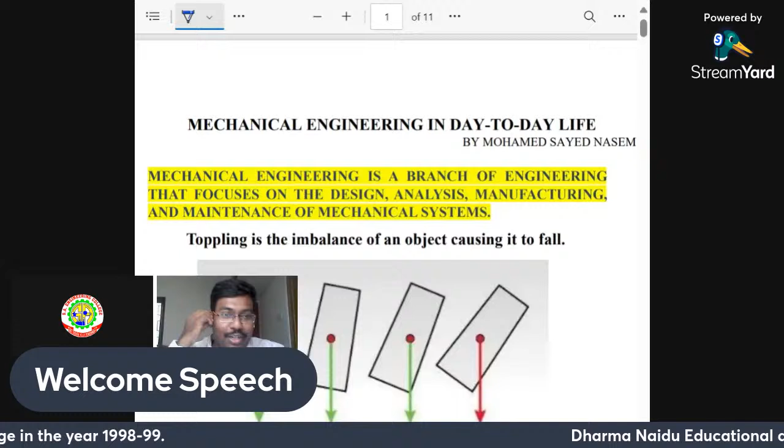Our main heading today is mechanical engineering in day-to-day life. So, from the time you get up in the morning and do your day-to-day activities, you encounter a lot of mechanical engineering activities or challenges or tasks. So here I would like to go through two concepts which you could grasp easily and try to implement in everyday life and appreciate how it works and how to design different concepts, right? So let's start.

Okay, so the basic, what is mechanical engineering? If you want to join a course of mechanical engineering, you should know what it is, right? It is nothing but a branch of engineering that focuses on design. It's going to be design. If you are taking this mechanical engineering course, you will be designing and you will analyze.

Once you have designed a product, let me say you are designing this pen, right? So I have two different pens here. Let's have an example. You design this pen, so you give some dimensions to this pen, how big the pen should be, what should be the size of the tip, and how is the grip. So that is nothing but designing. Okay. Then you analyze it.

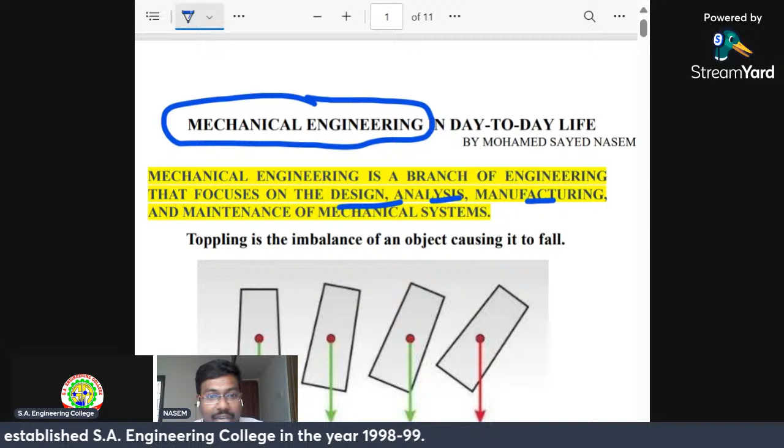So in that manufacturing part, what will happen is now I have a design. I analyzed that design and came to the conclusion that the design is good. But what if that design cannot be manufactured? Nowadays any design could be manufactured thanks to the latest technology and the intervention of computers into the field of mechanical engineering. It's making our life very easy. We have a lot of technology like laser cutting, where you can cut sheets and plates very fast and assemble very fast, right?

So now this pen, I have designed it, I have analyzed it, it is okay, but if it cannot be manufactured economically, that is one point in mechanical engineering to be noted. We are always concerned about the working and the cost. If you're going to buy a car, the first thing you ask is what's going to be the mileage, because the car you buy should not empty your pocket, right? And it looks good. And what is the initial cost of the car? So everything matters. Mechanical engineering deals with that also.

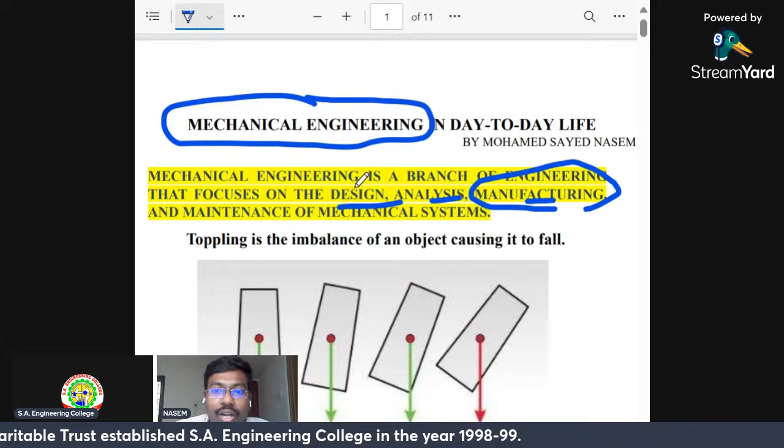So it should be able to be manufactured easily. Once you design, you analyze your design, and that design should be able to be manufactured easily. And it does not stop with manufacturing. It also comes to maintenance, right? Once you buy a car, after a few kilometers of driving you need maintenance. So in short, mechanical engineering is nothing but designing, analyzing, manufacturing, and giving maintenance to a product. So this is what mechanical engineering is. I'm just touching briefly on it, right?

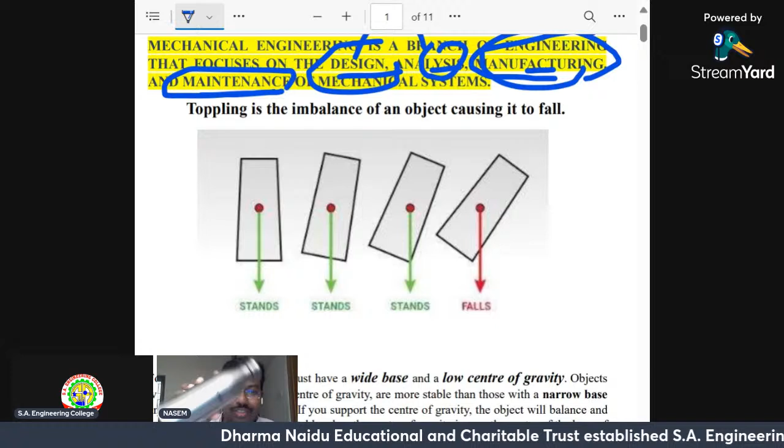So I want to teach you a topic: how an item or product is going to be a balanced product. For example, I have this bottle. I don't know whether you'll be able to see it. If I place this bottle on the ground, the bottle should be stable, right? It should not topple down. If it topples down, that means there is something wrong. You call this a failure. The product has failed because the purpose of the bottle is to store water and it has to be upright, right? So let's have a brief idea of when an object is going to stand and when an object will topple.

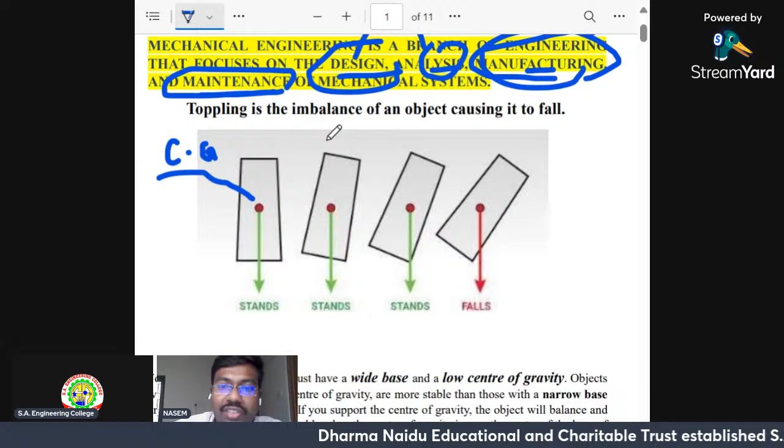So you would be able to see on the screen, right? I have an object and I have got a red dot. This red dot is nothing but the center of gravity, CG. In short, let's call it CG, the center of gravity. All objects have a center of gravity. So what is the center of gravity? Center of gravity is nothing but a point in an object where the whole mass lies. So if this is a perfect rectangle, I'm not able to draw a perfect rectangle, but consider it is. Can anyone type in the chat where the center of gravity will be?

Okay, the question is, I have a perfect rectangle. Let's start with two dimensions; we'll progress to three dimensions later. If I want to find the center of gravity, it is easy because this object is symmetric. I can draw a line dividing it into two, and draw another line dividing it into two. The intersection point of the two lines will be the center of gravity. Or, for a rectangle, you can draw the diagonals, and the intersection of the diagonals will be the center of gravity. Please mind my drawings are not accurate because I'm drawing with the mouse. I hope everyone adjusted.

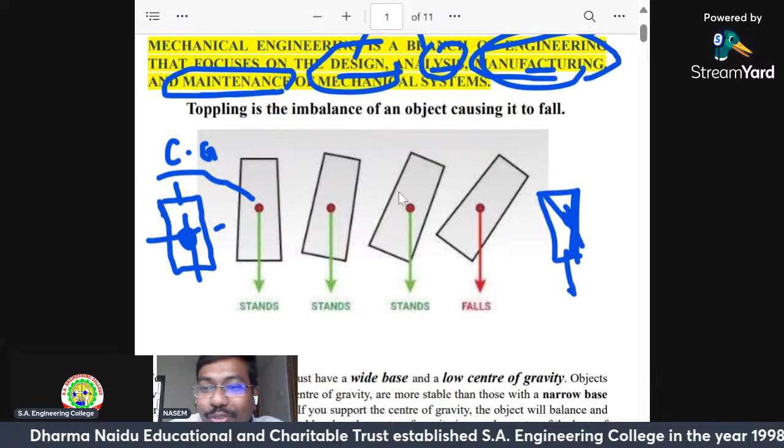Okay, so let's deep dive into this image. I want you to have a close look at it. Let me erase something here. So what happens is the center of gravity, or weight, you can call this weight also. Weight is nothing but a force due to gravity. So weight is nothing but a force. Weight is nothing but force due to gravity.

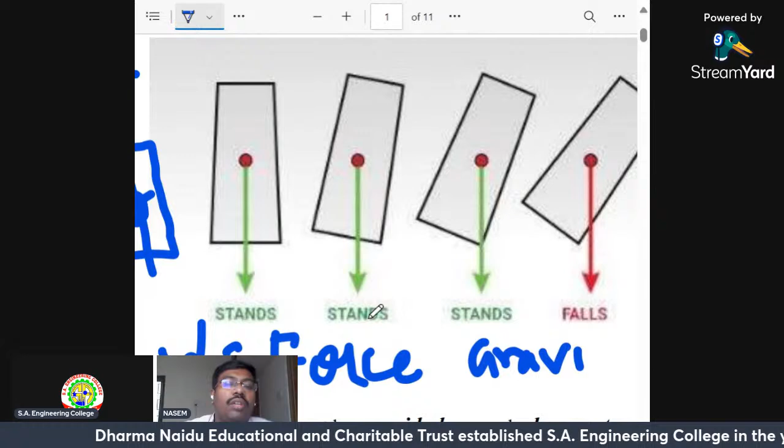Okay, so weight is nothing but a force due to gravity. So we can see the center of mass. So if this is the center of mass, the force is going to be downwards, right?

There are two conditions for a body not to topple. Number one, you need to look at the base. Let me change the color. Okay. So we'll look at the base. See, this is the base of an object, right? This base is quite wide enough. Okay. Base, and the center of gravity is at some height from the base.

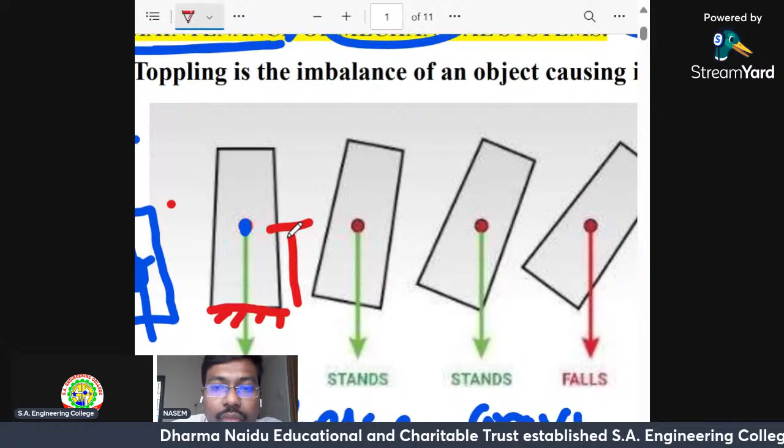So let me tell you a condition where you will have an object which does not topple. The condition is, for an object to be stable, it must have a wide base. So look at this base. This base is wide, and the center of gravity falls within the base. This line falls within the base. So this is going to be stable.

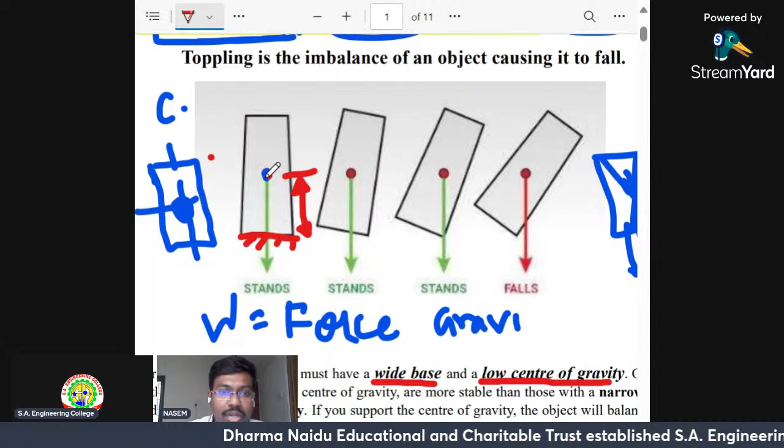And one more thing, which is very crucial, is bring the center of gravity as close to the ground. Look, this point is at some distance from the ground. If somehow I'm able to change my design and bring this point here, then it will be much more stable. So for an object not to topple, you have two conditions. One is the base must be as wide as possible. Number two, you need to bring the center of gravity as low as possible.

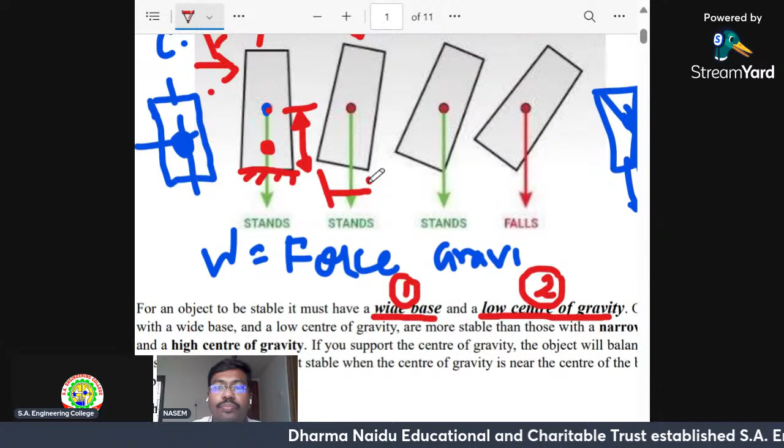So what is happening here is I'm just going to push this tumbler with some force, right? So if I push this with little force, this condition happens. So what is going to happen? Now look at the base. The base has shortened. The center of gravity is here, and now also the center of gravity line is within the base. You can see it in the diagram, right? The center of gravity is within the base.

So when you release the force, what is going to happen? The tumbler is going to come back to its original position. It is not going to fall down. If I apply more force, the tumbler goes a little bit more slanting, right? You can see this is the center of the tumbler, and now it's more slanting.

What happens now? Also, the center of gravity line is within the base. This is the base, right? This is within the base, at the end, at the tip. At this condition also, the object will not topple or the tumbler will not fall.

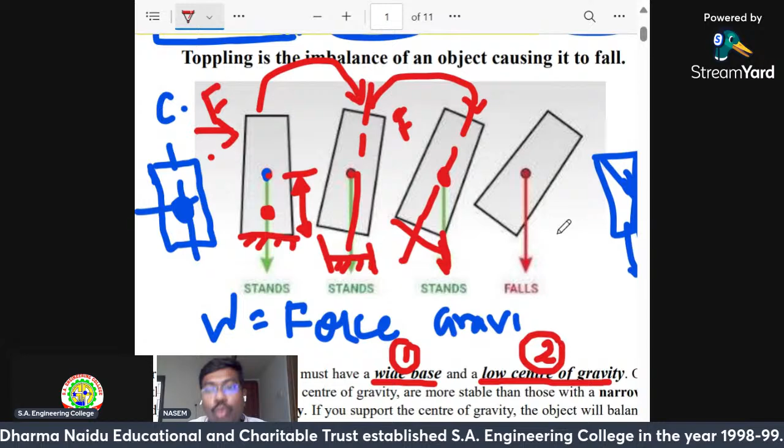If you apply more force, now what is happening? This is my base, and my center of gravity line is out of the base. When this happens, the object is going to topple. So basically, I just want you to grab an idea what will happen to our object, whether it will be stable or it is going to topple on applying some force.

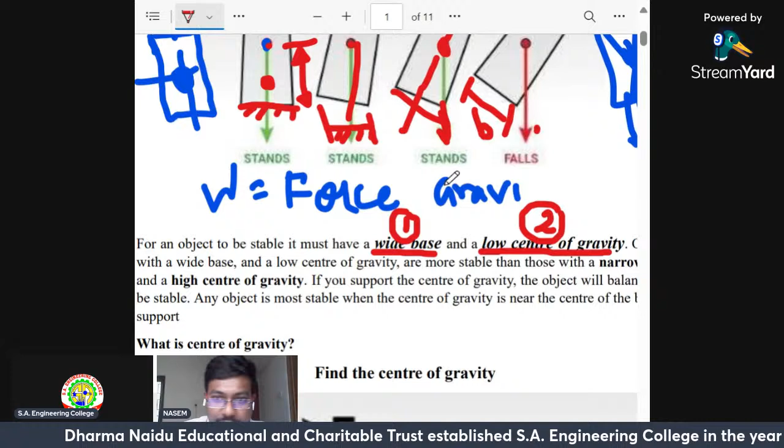In order to be stable, there are two conditions. One, the base should be as wide as possible. Second condition, the lower the center of gravity, the better. The second condition we have not seen. As of now, we have checked out what the first condition is, right? The wider the base, the better, right?

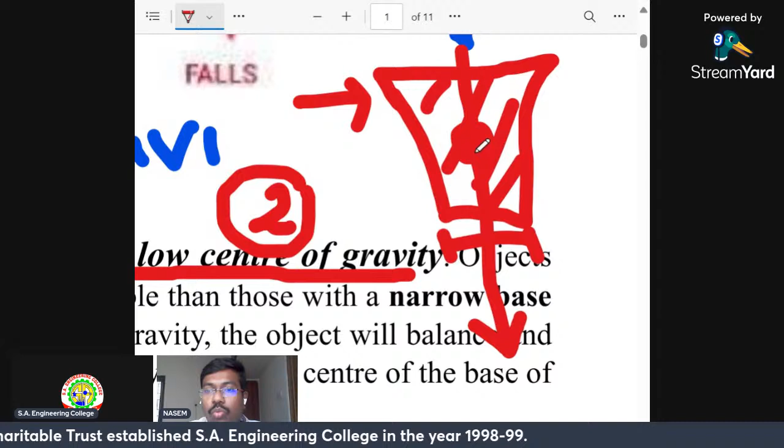For example, let me draw a small drawing here. So if I have a tumbler like this, and this tumbler is full of water. So what is the base now? This is the base, and still it is symmetric. If you draw a line here, your center of gravity should be somewhere here, and the weight should be in the base. So you can push this tumbler a little bit at some angle. At some angle, this center line will cross the base, and the tumbler would come down.

Okay, that's an idea. Now, if you draw a horizontal line here, dividing this into equal sides, the top portion volume is more than the bottom portion. That means the center of gravity will be at the top. If I design a tumbler with a bigger base, the bottom volume is more. That means the center of gravity will come down. Okay, so let me erase and go back.

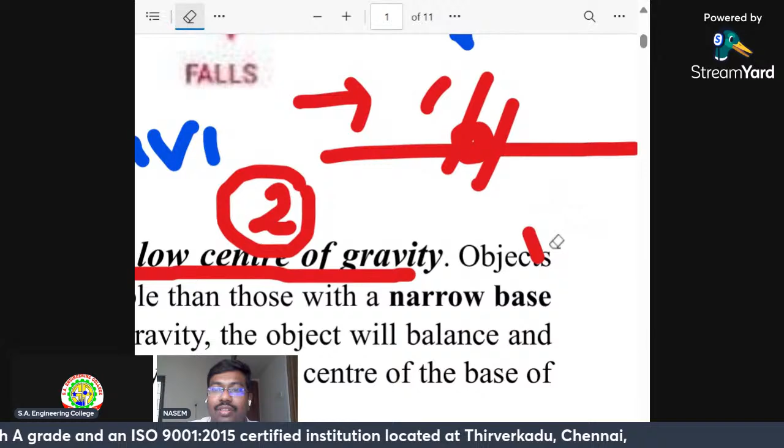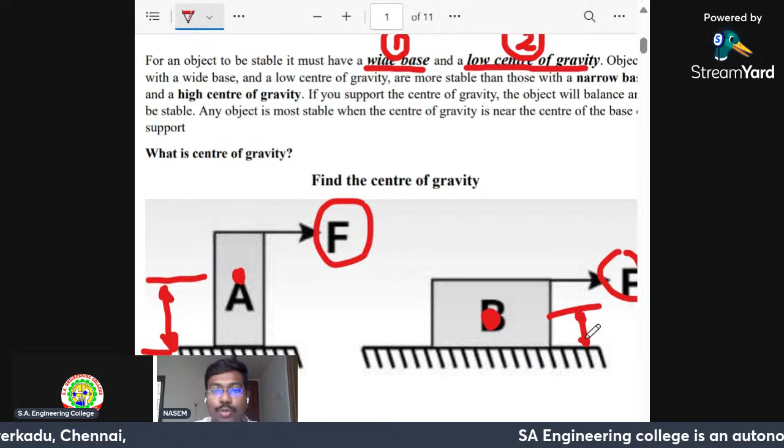I would like you to type in the chat. I would like people to participate and help me in making this presentation much more lively, right? So I encourage everyone to participate.

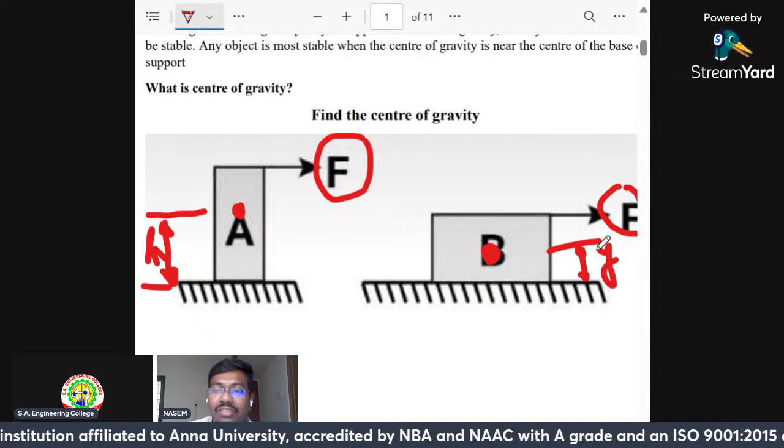So from this, you can see that the center of gravity of object A is much higher than B. And to be noted, A and B are almost the same object. You just tilt it, you will get B. Okay. So now, out of conditions 1 and 2, you can definitely say that whichever has a low center of gravity, that is better. So let me say this has a height h, and this has a height y. You can compare that y is very small compared to h. That means from this criteria, lower the center of gravity, this is a good design. I'm saying it is a good design in the sense that it is not going to tumble or fall. Whereas A has a much greater chance of falling.

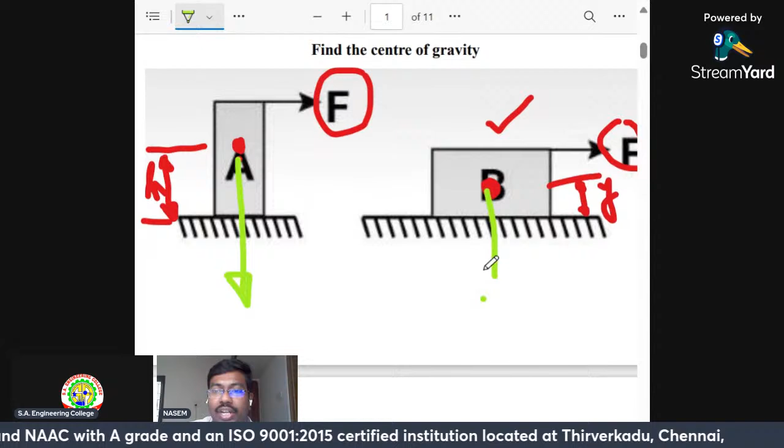Number two, wider base. So let's see. I told you that the weight is always going to act downwards from the center of gravity. So let's say this green is the weight force. So this has a weight force here. In this orientation also, you will have a weight force aligned with the center of gravity. Now I want you to compare with condition one. I told you wider base. Which has a wider base, A or B? This is the base of A. This is the base of B. Obviously, from the diagram, we can see that B has a wider base. That means, again, a tick mark for B.

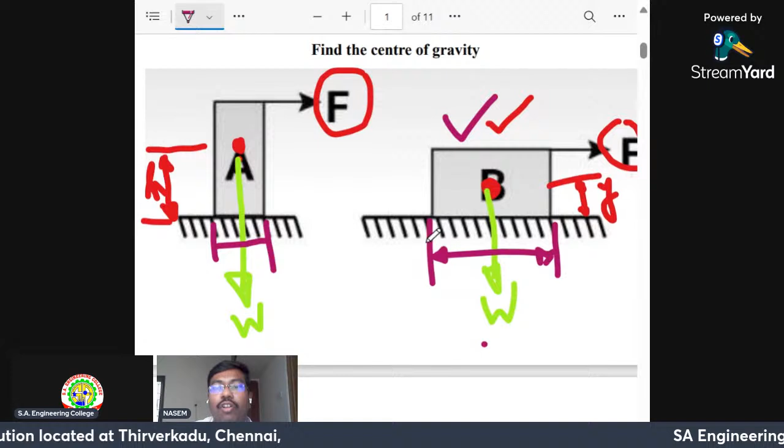So, if the same object is oriented in a different way, and if it is subjected to a force F, B is more stable than A. See, it is a very small change. I have not changed the material of the object. I have not changed the object. I just changed the orientation of the object. Changing the orientation, you can see how strong, how stable that object becomes, right? So these are the two conditions which I want you to remember as we go down the presentation: the wider the base, the lower the center of gravity, the more stable it is going to be, right?

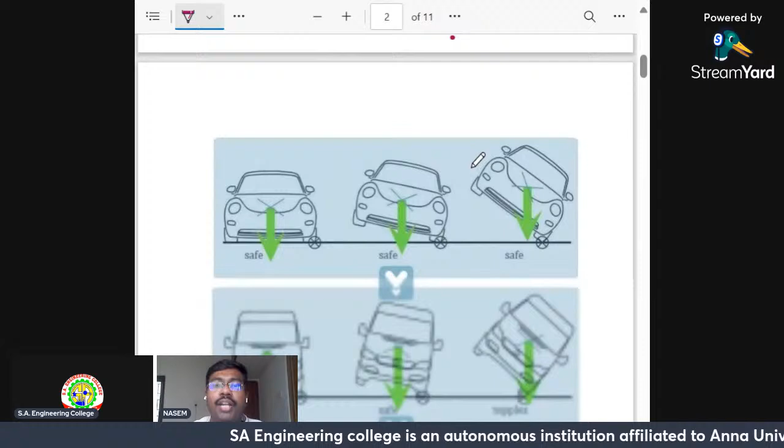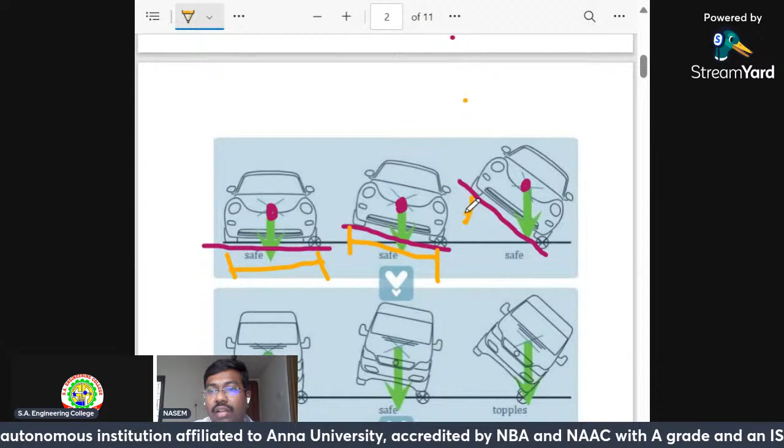So here I have a car. See, what is going to happen? The car's center of gravity is somewhere here. Same, the car's center of gravity is somewhere here, and somewhere here. We are riding this car on different slopes, making a turn on different slopes. Let me indicate the base with a different color. So this is the base of the car. Here the base of the car. Here the base of the car. So I want you to say whether this car will roll or not.

In this condition, the car is not going to roll because the weight force from the center of gravity is within the base, right? I told you the wider the base, the better. In this condition, the force is acting within the base. Okay. When I take this car, a smaller car, like a low clearance car, the height of the car is low. Because the height of the car is low, the center of gravity will also be low, right?

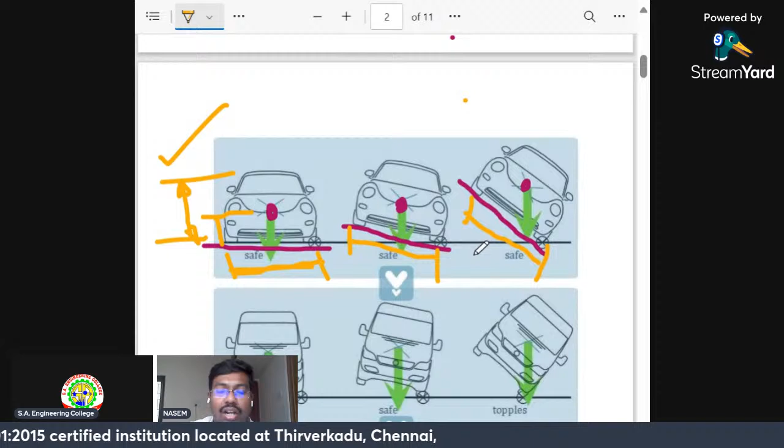So when you take this car to a slightly steeper road and try to take a turn, you will get this configuration. The center of gravity is down, the base is still wider, so it is going to be safe. Here also, when you take it to a much more tapered angle, so if the road is tapered much more to a larger angle, this is going to be safe as the weight force is within the base.

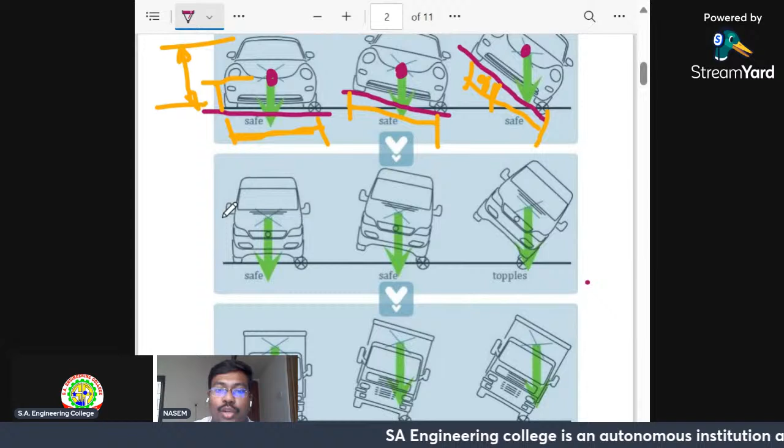Okay, now let's consider the same angle the car goes, but the car is different. Here you can see a car like a bigger SUV. It is a tall car. The height of this car is more when compared to one. Let me label this as two. Car two is much taller than car one. So the center of gravity is here. In this condition, look at the base. The center of gravity is within the base, so it is going to be stable.

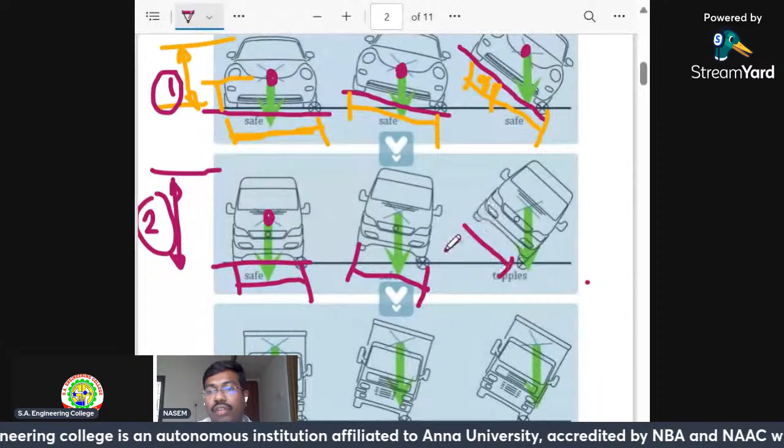Here, look at the base. The center of gravity is still within the base. Here, look at the base. The center of gravity goes outside the base. So this car will definitely topple in the third condition. If I drive this car at a much steeper angle, this car is going to topple.

So now let's look at the van. There is a difference between the center of gravity points, right? This is closer to the ground. This is much farther away from the ground. And now the center of gravity has gone really up because it is a truck. It is really high, and if the truck is loaded, the whole dynamics changes, right? Because the weight is distributed on top of the truck, the center of gravity will be above. So bigger distance. This distance is really high.

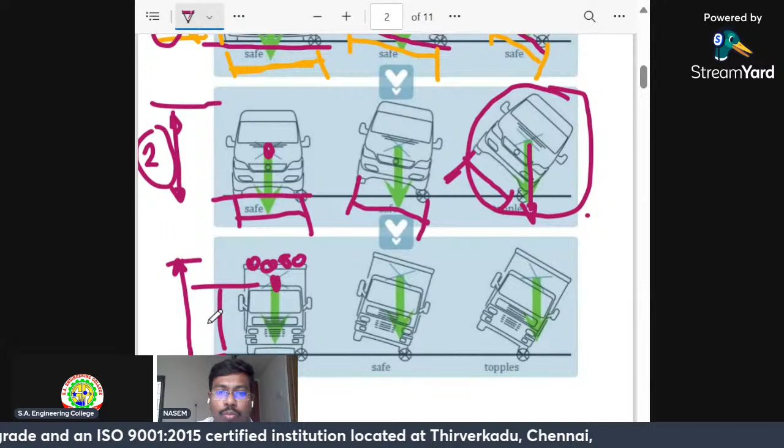So what happens when you take this truck and you try to drive it on a smaller slope? This topples. Okay, so you would be able to say whether the truck will be toppled or the truck will be stable based on two criteria, right? One, how wide the base is. Number two, how far my center of gravity is from the ground.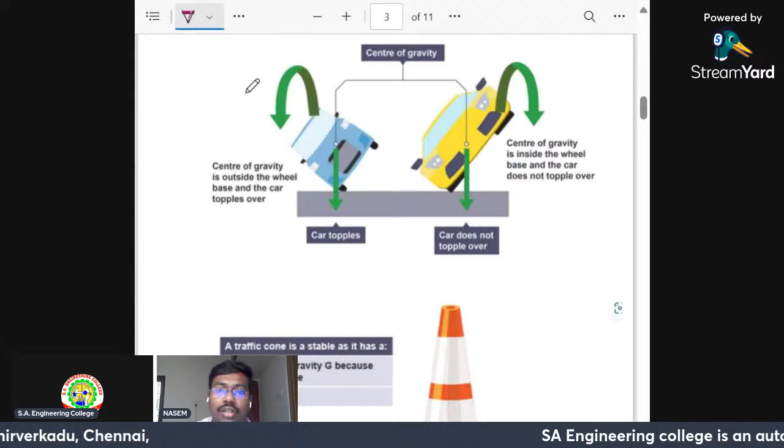Okay, so here you can see this car, right? This is car A, this is car B. It is just an example. So what is happening? This is the base. Here, look, this is the base. The center of gravity is out of the base, so this car topples. Here, the center of gravity is within the base, so this car does not topple. This is more stable. B is more stable.

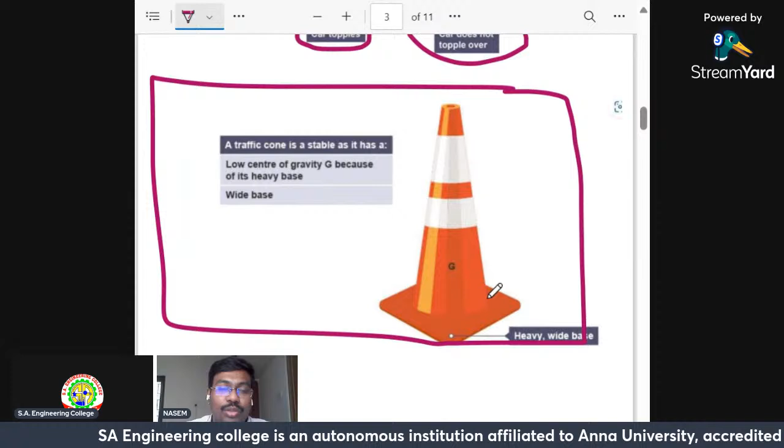So if you look and appreciate these designs, you would also have seen this cone, right? On all roads you can see this cone. The cone is designed in a particular way so that it does not fall down so easily. These cones are kept in rows in order to divide the roads and alter the traffic. It is designed in such a way that more mass is at the bottom. If you divide this cone into equal halves in size, say this is 5 units, the top will be 5 units, right? But the center of gravity is going to be much below.

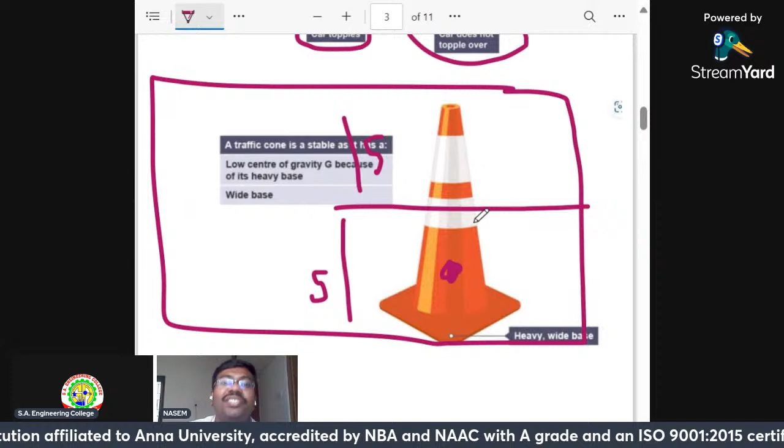Why? Because the volume of the cone above the center line and below the center line is different. More volume, more weight, so the center of gravity will be down in the cone. If it is symmetric, it will be on the exact line. If I divide my cone vertically, the right side and left side are the same. So the center of gravity will be on the center line and at the bottom. And in order to make the cone very stable, they are making a bigger base. That is why they have this square shape attached to the cone.

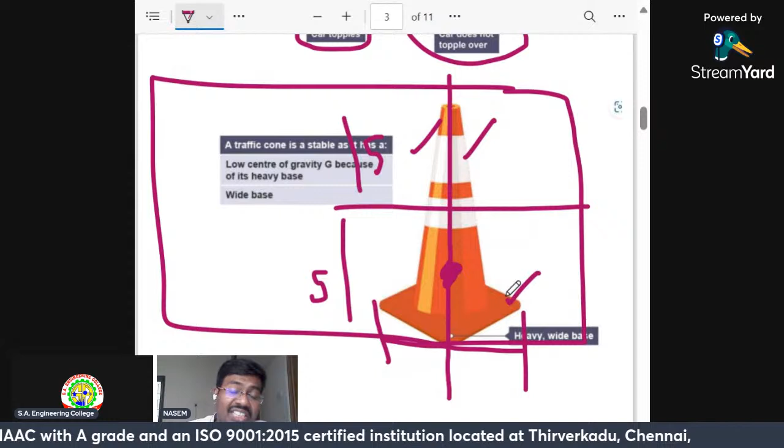You could ask me, why is it necessary to make the square shape? If you are making a product, the less material you use, the more profit you make. Your production cost is going to be less. But the application won't suit, right? If I don't have this base, if I only have this cone, what will happen? A little bit of force is enough to topple it.

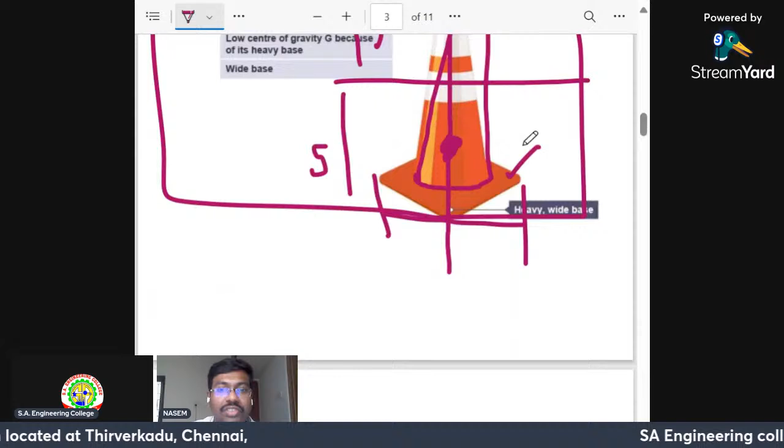In order to overcome that, we have a square or a rectangular base, so that I could widen the base so that it could be much more stable, right? So let's go into a more practical thing.

So if you want to make more money, what you do is you try to give as little juice to the customer. So the customer should feel as if he is having a bigger glass, or he is enjoying the royalty or luxury of having something big. But the volume of juice in the glass should be less, so that we could make more profit, right? If you are able to have a tumbler which can serve two servings, that means you are making profit of one glass, right?

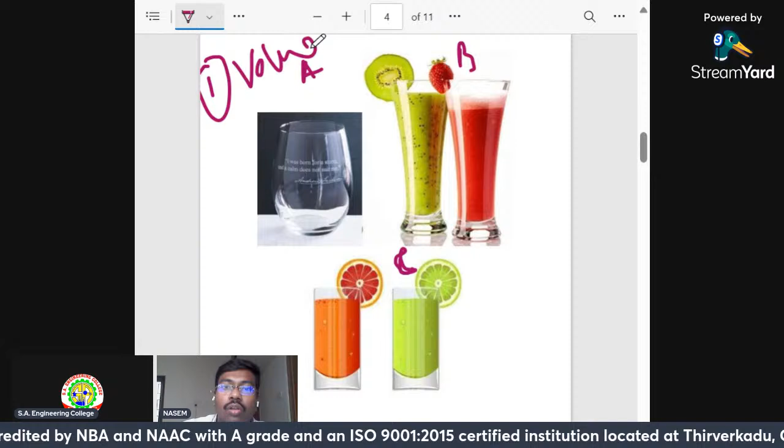So what kind of a glass would you purchase? That is one criteria. So our objective is that the volume of juice should be less. Number two, you will use this glass for a long period of time, right? So these glasses go for washing and you will give them to the customer. The customer will drink and place it on the table, and it should not break. So in order that it should not break, it should not fall down, right? It should not tip over.

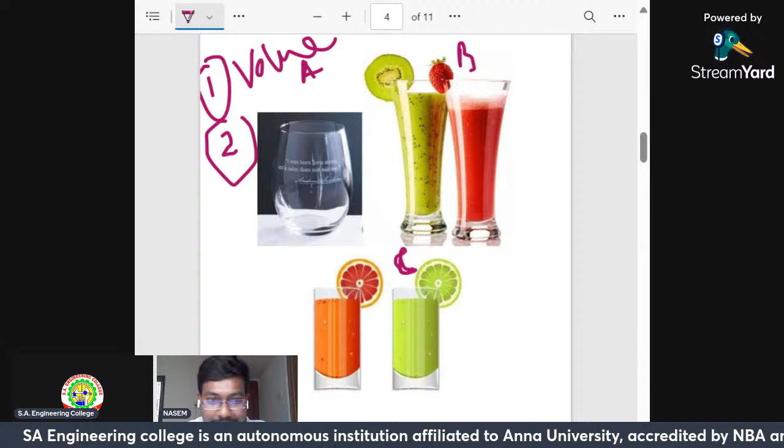It should be stable. So we are going to look into some designs now considering the volume as well as the stability. See, from criteria to criteria, requirement to requirement, our design changes. Here, our requirement is our glass should have lesser volume so that it looks bigger. The customer feels he is enjoying that royalty. And number two, the glass should not break. If the customer places it on the table, it should not fall down or topple.

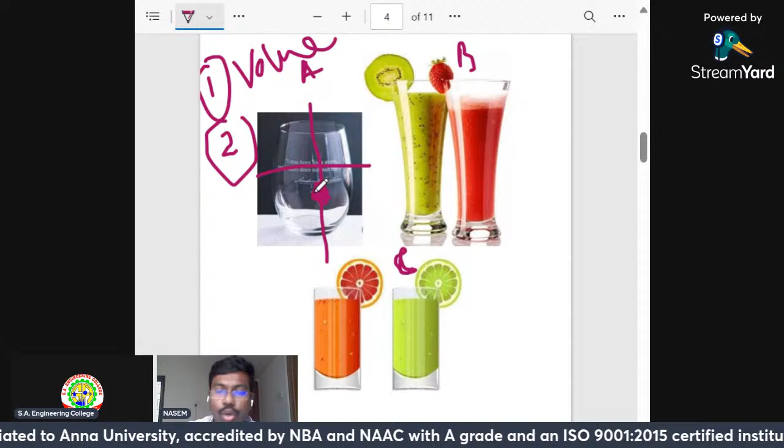Okay, so now let's analyze glass A. Glass A is pretty good. So let me divide this into two parts. The center of gravity, you can see from the geometry, the bottom is bigger. So the center of gravity will be at the bottom, somewhere here. And about this line, the y-axis, it is symmetrical. So the center of gravity will be here. So one criteria is to lower the center of gravity. This is good.

Now let's analyze this one. Here, if I draw the line of symmetry, it is symmetrical. Now more volume is at the top. Let me choose a different color to represent the center of gravity. The center of gravity point will be at the top. Look again. Here the center of gravity is at the bottom. Our condition is to lower the center of gravity. Stability is good. So when you compare these two glasses, which is better?

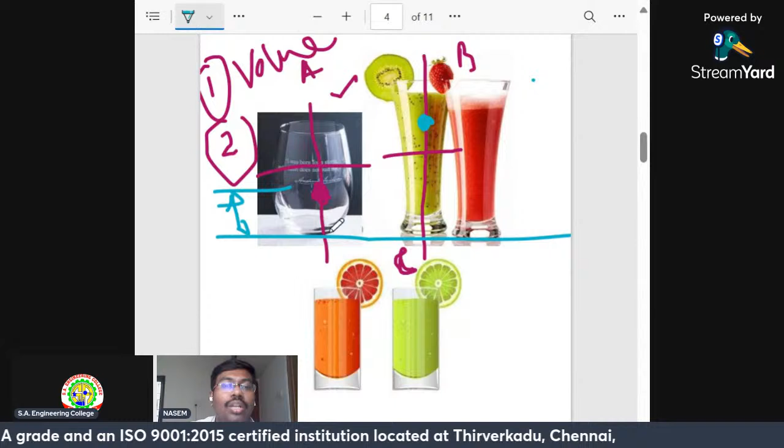This glass is prone to less breakage due to tumbling or falling down. This is much more stable because the center of gravity has gone down, and one more, look at the base. This has a wider base when compared to this one, which has a shorter base. So glass A is clearly the leader here over glass B. But we are comparing only the stability.

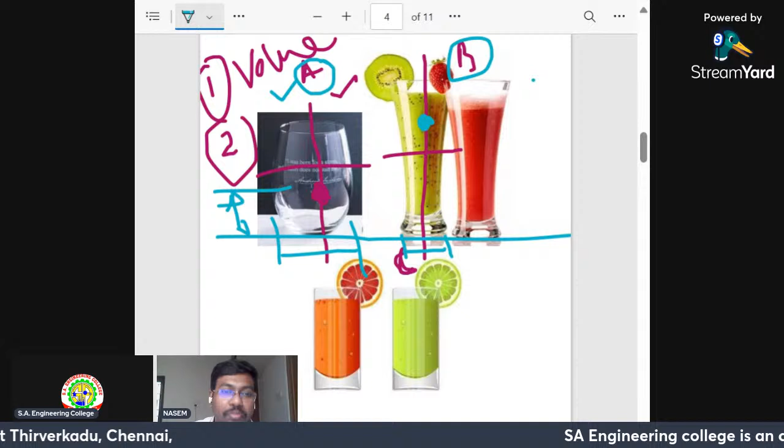When you compare the volume, glass A will occupy more volume. That means you will be serving more juice to the customers if you use glass A. And it looks small. Even though he's enjoying more juice, the customer will always feel he has been given something small and it is not value for money. Whereas when you give this glass, the customer feels that he has more juice, but actually less volume of juice is in glass B, but the glass falls, right?

So in A, for condition two, it is stable but more volume. In B, it is less stable but less volume. Both have an advantage. Let us go for glass C. This looks like a rectangular glass. So if I divide this equally, the center of gravity will be exactly here, and it has a wider base.

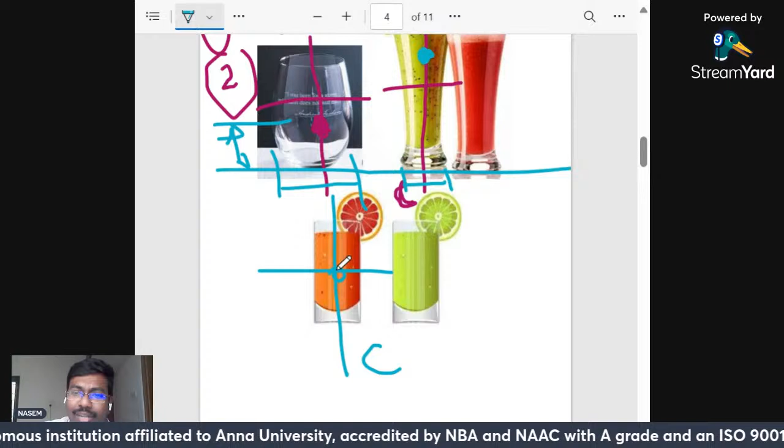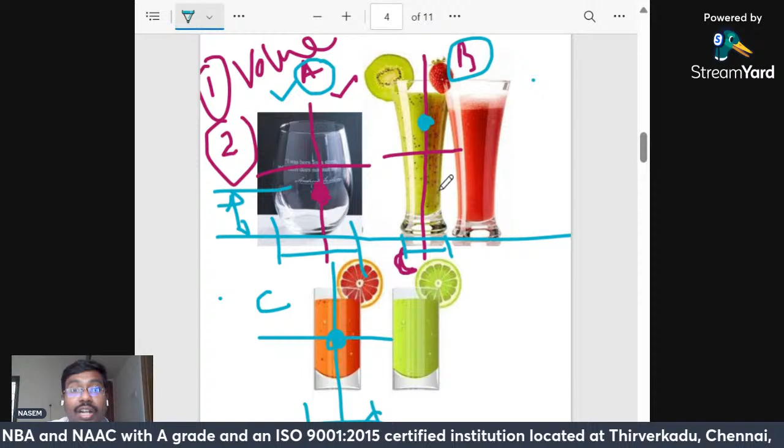Compared to A, C has a much higher center of gravity, but compared to B, C has a much lower center of gravity. That means C is more stable compared to B. And when you compare its volume, this takes more volume than B, but less volume than A. That means you will be pouring more juice in tumbler C compared to B, but less juice in tumbler C compared to A.

So this is also okay. This is going to be stable, but still I'm not satisfied with the design because I want to satisfy both the conditions, volume and stability.

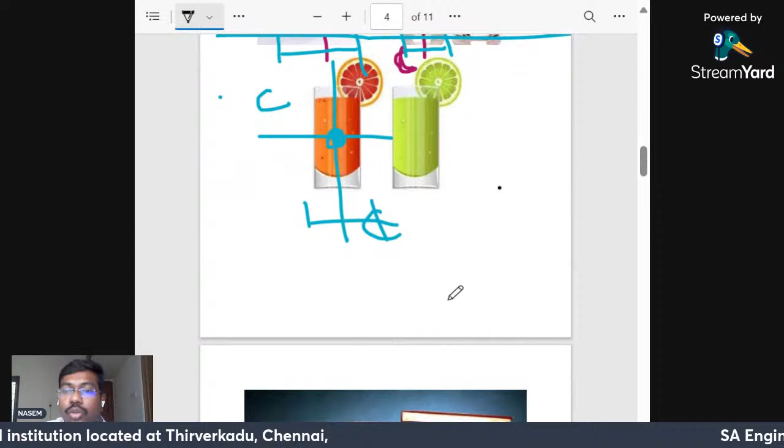Okay, sorry, I'm not able to write it fast. Stability. Okay, volume and stability. So what could be an ideal glass design? Okay, look at this. You can invert this design. So how will be the inverted image? Let's go. So this, I'm just inverting. I'm not good at drawing. Just I've inverted the glass. Now the opening is at the top, bottom is wide. So what is going to happen?

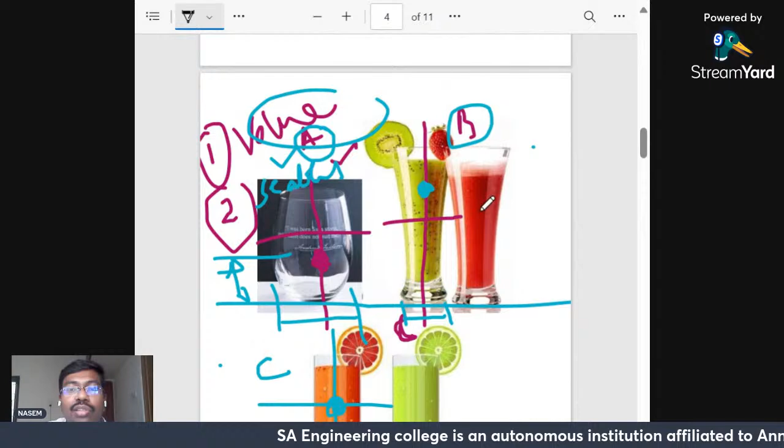Wider base. Okay. So look, when you divide this into two equal parts, bottom has more volume. That means center of gravity will be below the division of this line. So it has a wider base. You brought the center of gravity down, and actually the volume is same as this glass B. So you could design or buy a glass D.

If you are able to buy a glass D, you will be able to give customers lesser volume, but making them feel that they have been served more, and this is not going to break so easily. This is not going to topple down accidentally if the customer pulls the table or pushes the table. This is going to be more stable, right?

So now I want you to think about these books. So this is a heavy book, smaller book, heavy book, like that, stacked one above the other. So if this system is stable, where should the center of gravity be? Okay, as an engineer, I'm not really interested in the exact location, where it is 25 centimeters from end A. Let me call this the A end. Let me call this end the B end. So where is the center of gravity? I am not bothered. If the system is going to be stable, that means if this does not fall down, what should be the criteria?

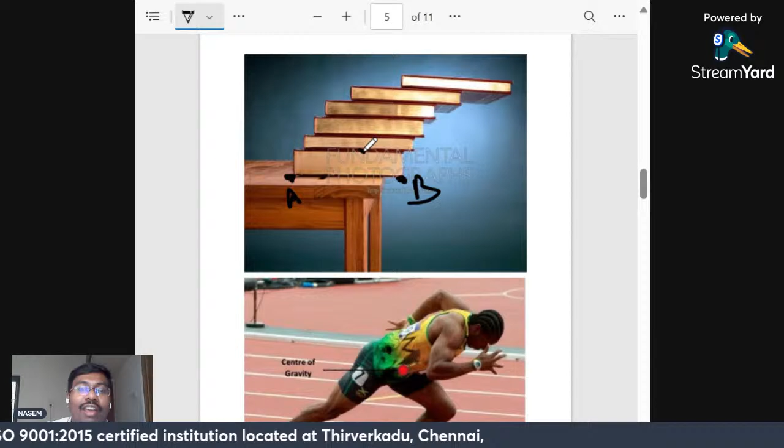The center of gravity or the weight force should be between A and B. I don't know where it is. It could be here. Okay. But how am I telling that it should be between A and B? Because the system is stable. Stable system, it has not toppled. So the center of gravity W, the weight, is going to be within the base.

So what happens if I add more books here? Slowly this W will move. Let me choose a different color. This W will move here by adding a book. So again, I add another book. Let me add a purple book. What happens? The center of gravity moves here. It will keep on moving because the mass is shifting towards the right and the mass is being added towards the top.

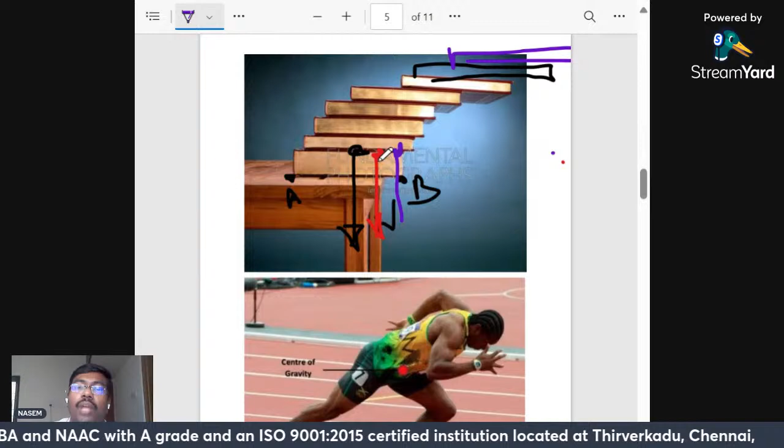Actually, this point will be somewhere here. This purple point will be here. It will be moving up, up, up. Why? Because I'm adding books up, up, up, and adding the books to the right. So the weight is distributed to the right and the mass is distributed above, right? So what happens? This is also stable.

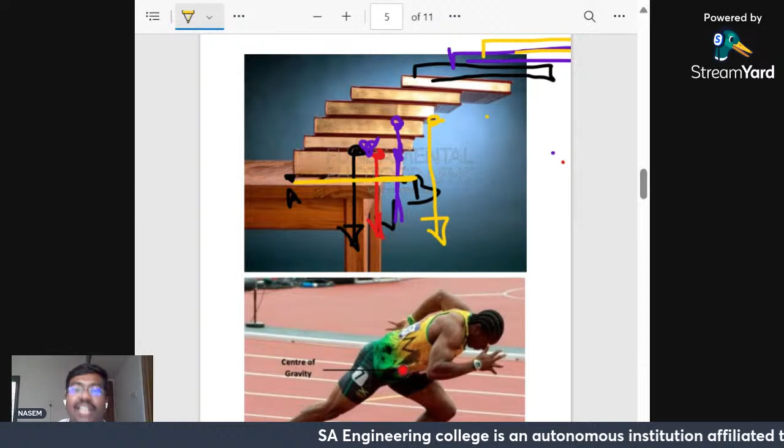Now, if I again add another book, what is going to happen? The center of gravity will be somewhere here. So now the base of the book is here and the center of gravity is out. Now what will happen? The bridge which you have built will collapse. Okay, this is just to give an idea that if a system is stable, the center of gravity should be within the base.

Okay, now let's look at this athlete, how he makes use of this principle of being stable to run. You can always see that athletes start their race from the lower position and they climb up slowly. Why? Because when their body is at a lower position, the center of gravity is much closer to the ground. Okay, as this person stands up, his point will move up and up.

So that's the reason why all athletes start from a lower place, because they need acceleration. Initially, they need to accelerate fast in the X direction, right? If they're accelerating in the X direction, that means there is a force in the X direction. So if they are standing and trying to run, they won't be able to balance themselves or get that acceleration to move. That is the reason why all the athletes start from a much lower point. Right? You get this idea.

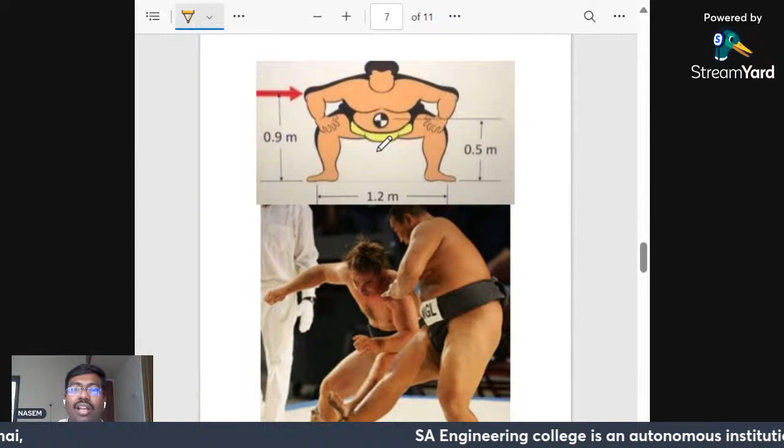Okay. Now let's see a sumo wrestler. This is a sumo wrestler, and you can see the center of gravity of the sumo wrestler. Sumo wrestlers always use this position. Okay, they are always in this position. Why? Because number one, they widen the feet. Because the wider they are, the more difficult it is to topple them in sumo wrestling.

I guess everyone knows what sumo wrestling is. You try and apply force on the other person so that the other person topples down. The whole objective is to make the other person fall down. So if you don't want to fall, this is the principle the sumo wrestlers use. They keep their legs and feet apart.

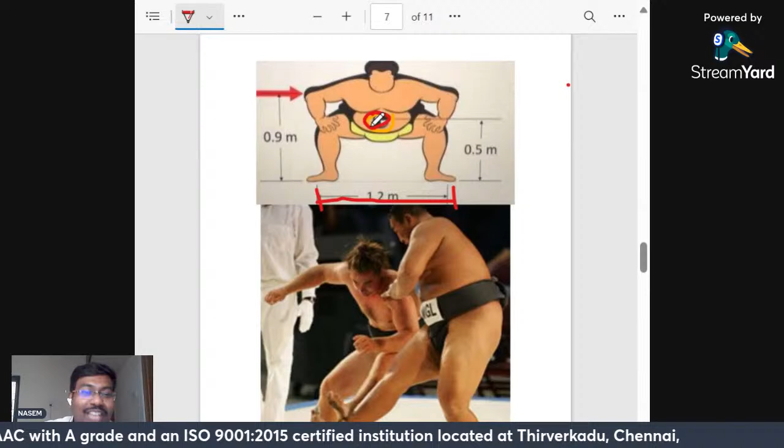Have you ever wondered why these people strangely or crazily keep their feet apart when others could keep their legs close? Some people say, sir, they're very fat, so they must have fatter thighs, so their legs are not able to be closer, so they keep the legs apart. No, they train and they make the body in such a way that they're massively heavy. They put on a lot of weight because more force, right? More force pulls towards the ground, and they keep their legs as wide as possible so that it is very difficult for the opponent to apply a force and topple them.

And they squat down. The purpose of squatting down is to bring the center of gravity as close to the ground as possible. So this gives a clear advantage to sumo wrestlers who are shorter, who are heavier, who have bigger legs. So if they have these genetics by nature, they would be a brilliant sumo wrestler. Okay, so wider. That's the reason why the sumo wrestlers squat down. Their legs are spread as wide as possible, right?

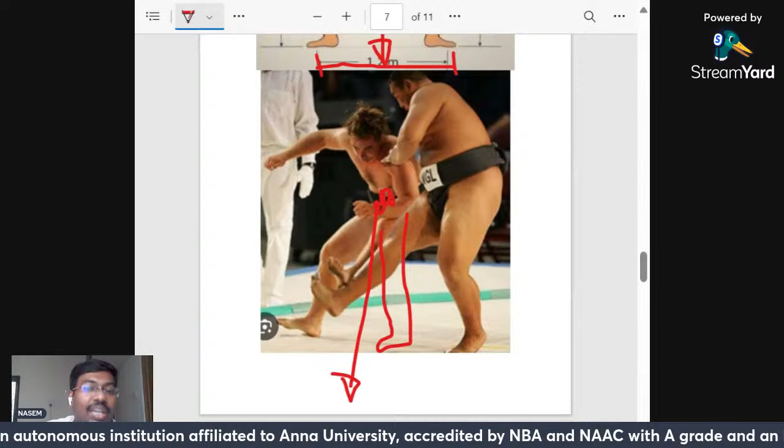So now you can see this sumo wrestler taking on this wrestler, right? What he's trying to do is kick the other person's leg. If his leg was here, the center of gravity is somewhere here. The center of gravity is between the legs. So he will not fall. So the objective is to remove this leg. That is what this sumo wrestler is trying to do.

He's trying to kick this person's leg so that now, instead of this being his feet, his base becomes this. If the leg is kicked up, okay, now the leg is up, he has taken out his leg. So the gravity is somewhere here, the feet are somewhere here. That means this person will definitely fall this way. Okay, you can really appreciate how the center of gravity principle is used in sports, especially in wrestling.

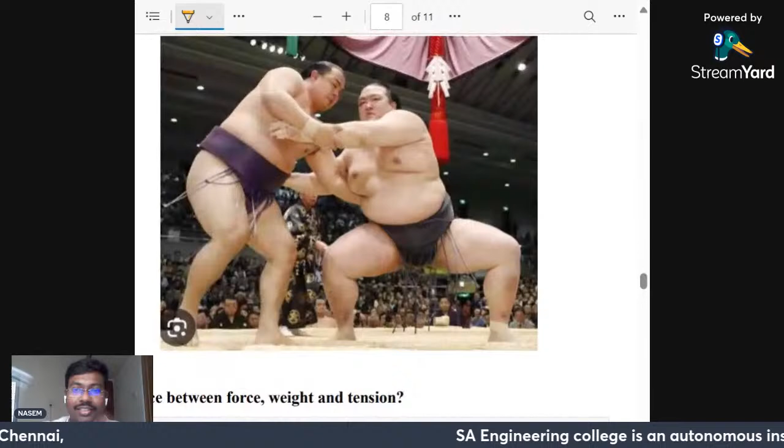Here also another sumo wrestler is trying to take on another sumo wrestler. Here, if you see this wrestler, wider base, he's stable. He is squatting down. That means a lower center of gravity. His center of gravity is somewhere here, right? So

what about this person? The other person, okay. The other person's feet are here, and his center of gravity will be up somewhere here. Why? Because he is in a standing position. The center of gravity is higher. So he's trying to push him, topple him. So at this position, it is easy for him to throw him over.

So in order to throw him over, look at this wrestler using the principle of engineering. He squats down, feet wide apart, holds him tight, and he is trying to push him, angle him in this way, angle him in this way, lift him a little bit up so that his center of gravity is going to be higher. So it will be easy to topple him.

Okay. So we have learned this concept of stability now. As of now, we have learned how to make things more stable. Right now, we'll learn how to make certain things much stronger. Okay. Because at the end of the session, you will combine these two ideas and you will be using them in day-to-day life. That's what I want to share with you.

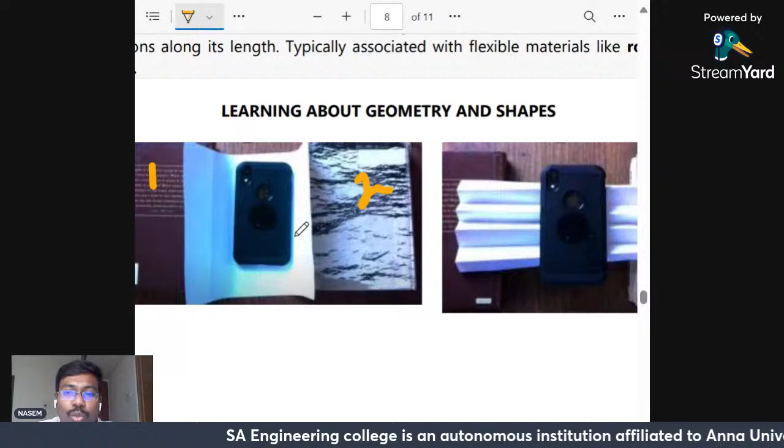Here you can see that I'm trying to balance my mobile with the help of a paper. I've placed a paper between these two books, book one and book two, and I've dropped my mobile. What would you expect? The paper would definitely crash through. But with a little engineering, you can make this happen, right? So here what I have done is I have just folded the paper. You can see how it is folded. The paper is just folded and again stretched.

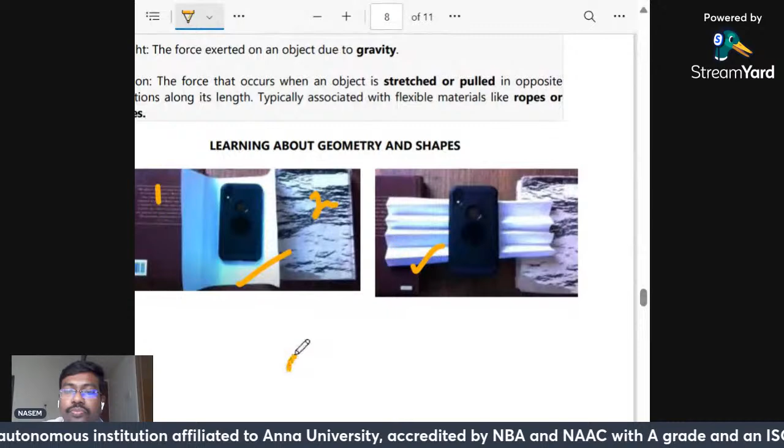Okay. And now if you place the same mobile on the top of this paper, it is not going to collapse so easily. So the paper is the same. What you have done, you have applied a very small principle by folding it. You can call this corrugation. You see the rooftops, you'll have sheets like this. These are called corrugated sheets.

And if you see trucks, the side of the trucks, Tata Ace, all the trucks, right? The side of the truck wall is not a flat sheet. It is nothing but a corrugated sheet. It's like this instead of a flat sheet. Because when you do this, the material becomes stronger. I just want you to understand the concept. When you change the shape, the material gets stronger, right? Stronger. And you will use less material. Have this idea as you progress.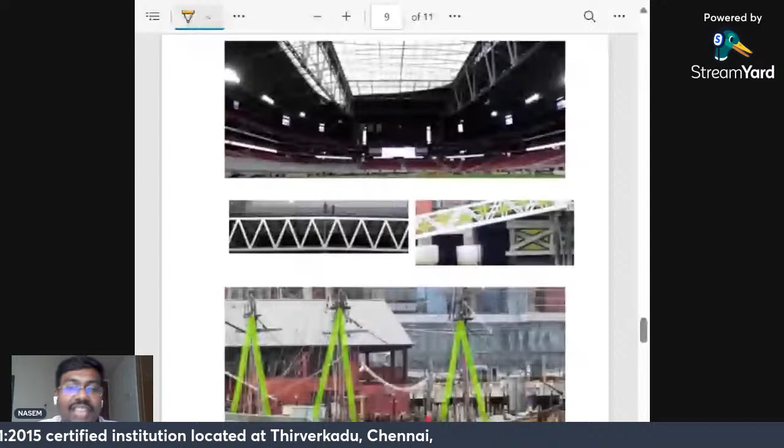Now, I want you to look into the different shapes which you see around every day. Okay, this is a stadium. In a stadium you'll see a lot of beams. There are no columns in the stadium. You can see beams. The purpose of beams is to support load. Okay, so the stadium should not have any columns. You should not have any vertical columns because it is a football field.

People should play football, and the audience who are paying money to watch the game come to the stadium to have an uninterrupted view, right? So if you have so many pillars, it is not going to satisfy our condition. So in order to satisfy it, there is a long span of beam without any pillar, and this beam should carry the load. So how do they do it? It is a simple shape. I want you to appreciate and have a look at your surroundings.

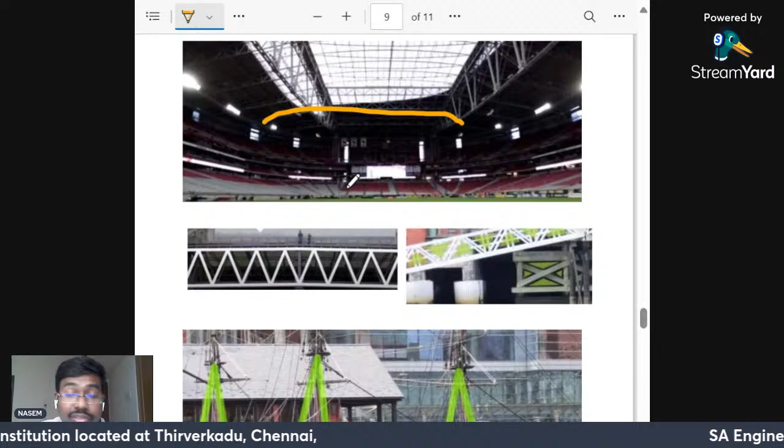When you go out next time and see a telephone signal tower, you will always see this shape, a triangle. There is something unique about the triangle, and I love triangles because the triangle is the strongest shape ever. We'll all see how it is. Okay, just understand the triangle is the strongest shape, and that is why triangles are used everywhere.

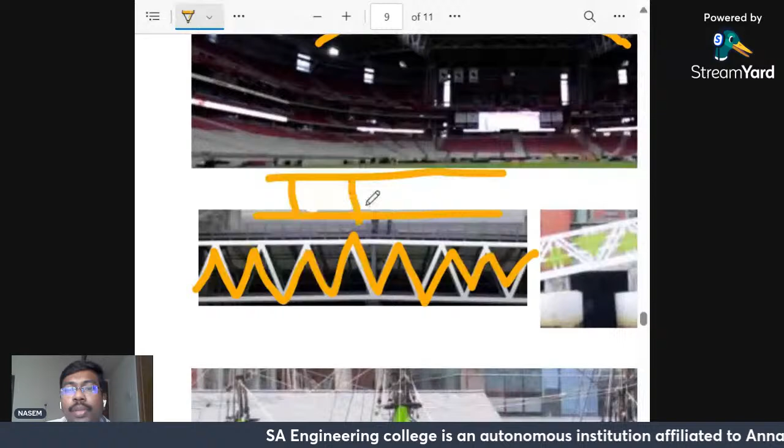See this bridge? These bridges are supported by these triangles, right? You don't need to have these triangles, right? If you have a bridge, you can have a bridge like this. You will have vertical pillars which hold the top and the bottom. When compared to this, triangular ones are really stable, really stable. That's why you can see all elements made of triangles.

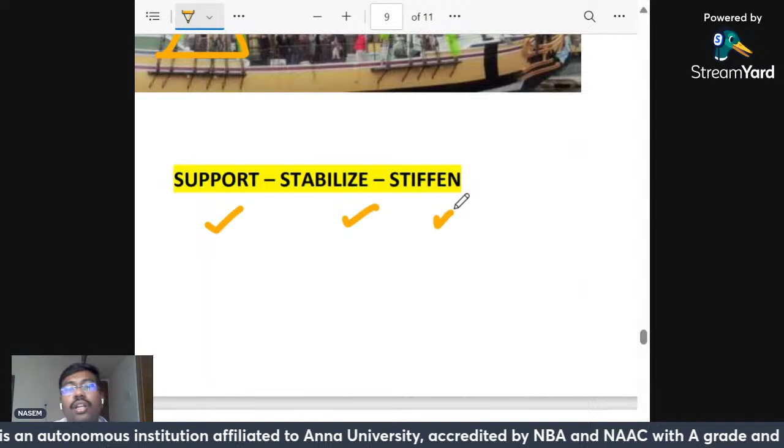Okay, look at these bridges. You can see these triangle shapes made into different triangles. See the sailing boat. You can see how the sail ropes are tied, and it makes a triangular shape. So the triangle supports, stabilizes, and gives stiffness. Remember the shape. Why I'm asking you to remember the shape is triangles are the easiest shapes, and they give real rigidity to objects. That's why it is used in bridges, in towers, and elsewhere, right?

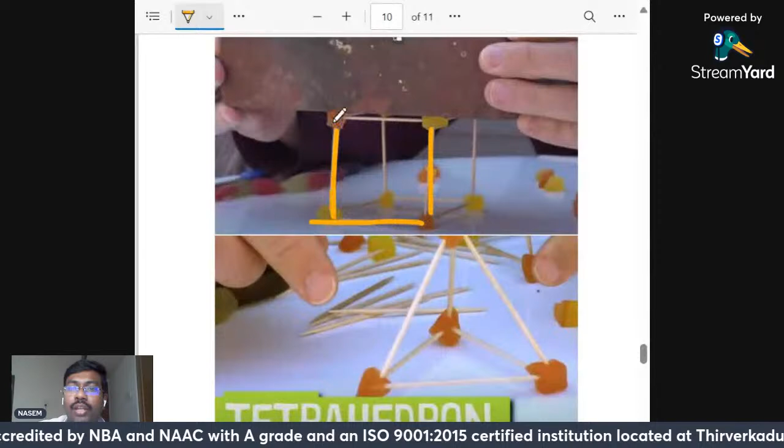Here is an example. I'm trying to balance a brick using this system. This is nothing but some jelly gum, or something. You have toothpicks, and these are nothing but squares, right? I have one square here, one square here, one square at the bottom.

You can say this as a cuboid. All the sides you have squares, and these squares, these lines, are nothing but toothpicks connected, right? And now if I place this brick on top, it will definitely collapse because squares are not strong. I told you the strongest structures are triangles.

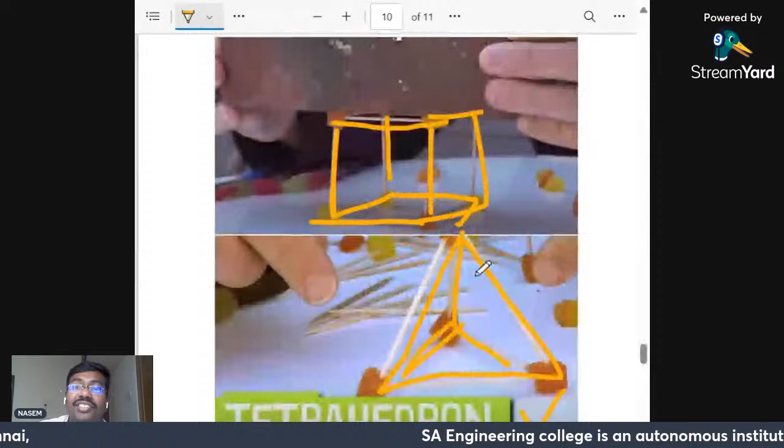So if I make this structure like this, there is a triangle here, there is a triangle at the bottom, there is a triangle here. So if I have these one, two, three triangles connected in this structure, this is called a tetrahedron structure. It's nothing but a collection of triangles. This is nothing but a collection of squares. So on this there is only one point here. I won't be able to balance a brick.

So if I have more tetrahedrons, my structure is like this. These are nothing but tetrahedrons, right? Three triangles joined. If I then apply a load here, this will not collapse. Why? Because of a simple shape, triangles. I told you, right? Triangles are really strong.

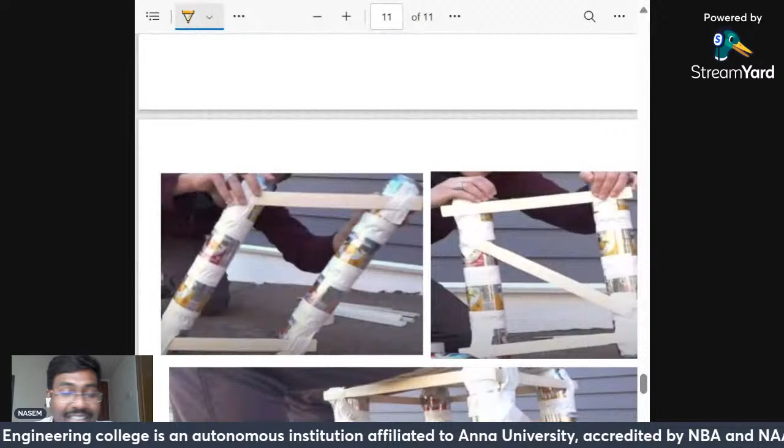So now let's combine the two concepts together. What we have learned, right? One is how to make an object more stable. You should have a wider base, and the center of gravity should be as low as possible. Number one, and number two, what we have studied today is the best shape to bear load is triangles, right? So we'll go with a practical example, and with this example we'll wind up. I won't take that much of your time.

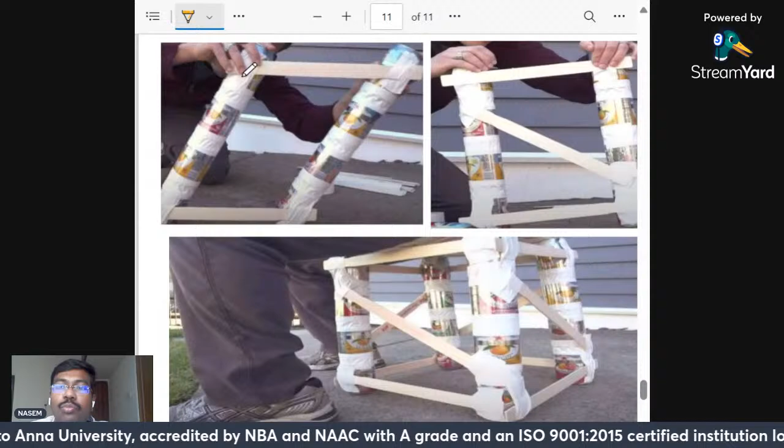If you see this, my objective is to make a chair with Pepsi tins. So what I'm doing is I'm connecting three cans here, taping some wood here, taping some wood there, making it a square, right? I'm building like this. I made the square. With this shape, you can't sit on it. So I should have another square. You get it, right?

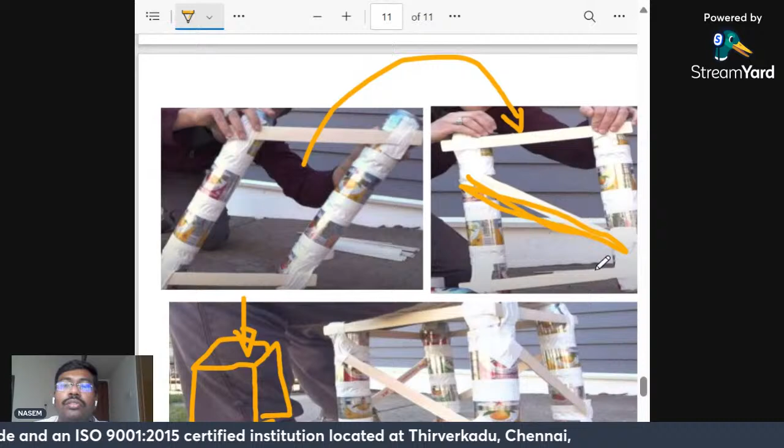I'm making a chair. Now, if you apply a load, this will try to shake because there is no triangle here. So from this, you can improvise your design. Now I'm using the same design. I have a square and I have attached another support here. So now you can see the similarity. Here is a triangle. Here is a triangle. So this is going to be much stronger.

Now from this, if you add all four sides, this is the first side, back side, second side, third, fourth, you get a chair, same square, and I have just placed one stick diagonally, making these triangles. So it is stronger. If you want to make it much stronger, you will add another stick in this direction.

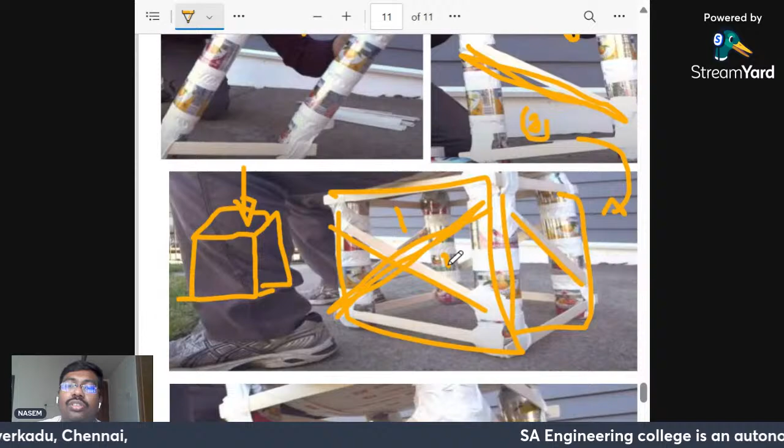So this makes one, two, three, four triangles. It becomes four triangles, right? So look how stable it is. Triangle, triangle, triangle, triangle. Everywhere triangles. So this makes it ultimately strong. So now I want you to take this concept, go to your house and look. If you have a chair with four legs, how can you make the chair stronger? It's simple, right? I don't have a blank page, so let me scroll this.

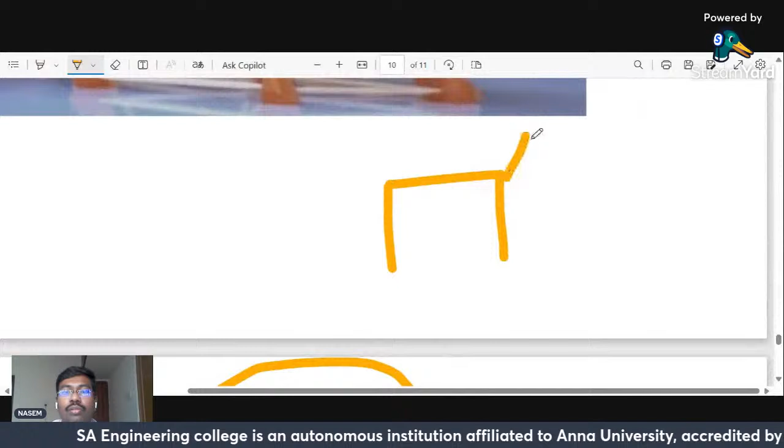If I have a chair which has four legs, right? Usually a chair has four legs. So now take this concept to your house and make the chair stronger. Initially, you will try to form triangles. If I form a triangle here, it will be much stronger. I want an X here. My legs have to go inside. Let me design a table.

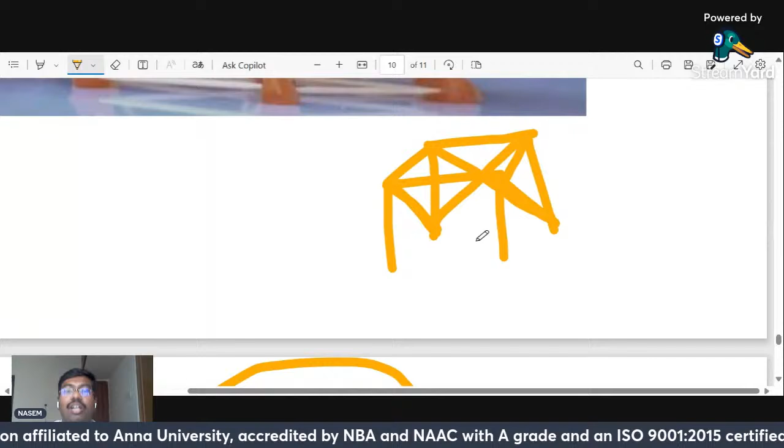So instead of four legs alone, if you add one more member joining the other two ends, it will be much stronger. If you want to make it much stronger, go to the back side and add two more X's there. This will create a much stronger table, right? With this, I guess you would appreciate how to make a structure stronger by very simple changes. Triangles are very strong. Go outside today and look around. How many triangles are you able to find? You will find more triangles. This makes things really strong.

And another concept which we have studied today is how to make things stable, right?